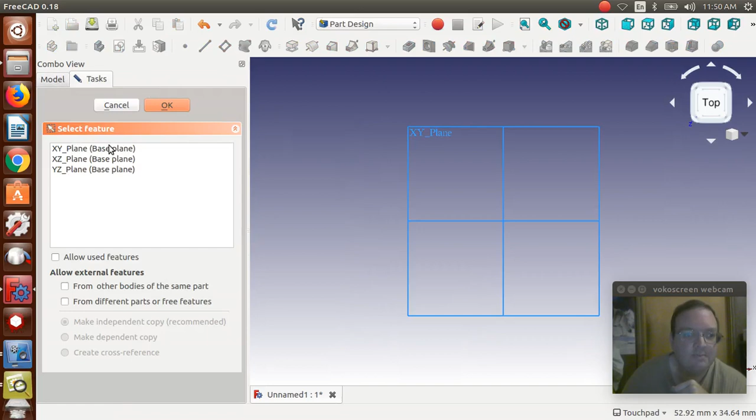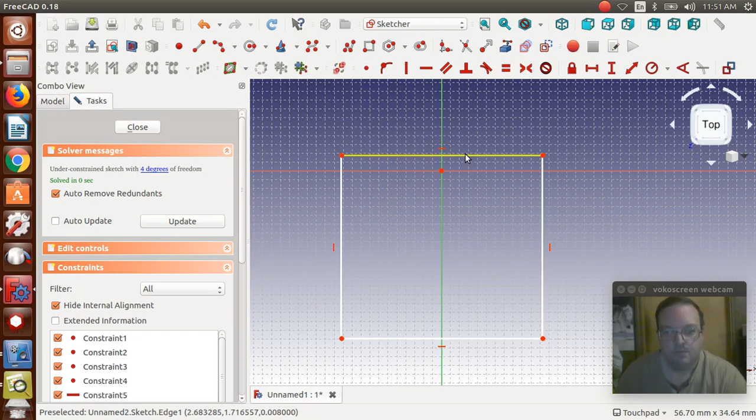Bring this up and over a little bit so you can see. I'm just going to create a box. I'm going to make this 66, and I'm going to make this one here 40. And then I'm going to make it out of symmetry, so that's in the middle there. Then I'm going to go 5 millimeters, so that the brow is 5 millimeters above the.

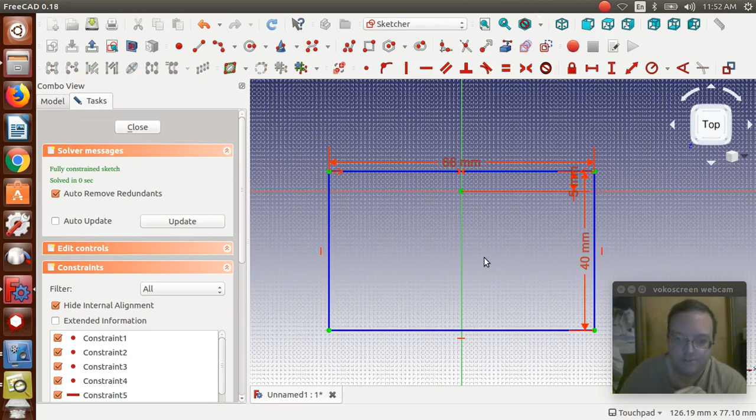And then I'm going to select all the lines by control clicking, and we're just going to make that a construction geometry. Then I'm going to use, if you go to this one, I like to use the 3-point arc. Click the ends of this and bring the brow down some.

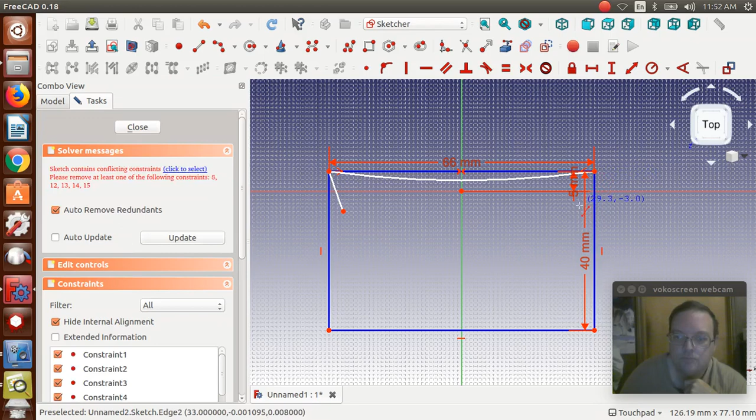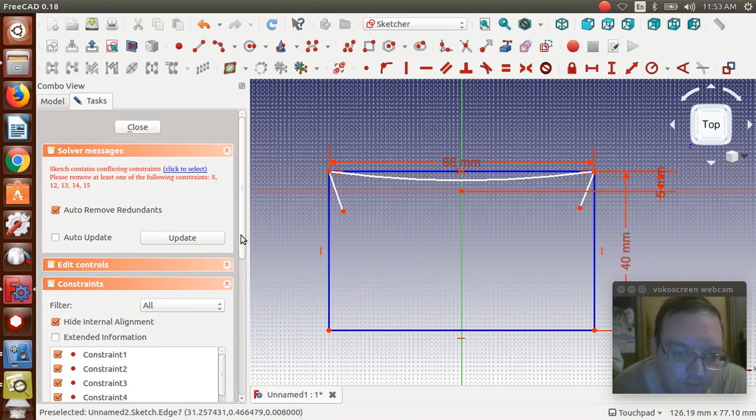Click there. Then I'm going to click, wait a minute, I'm going to make 2 lines. Something happened there. What happened? Seeing I was in conflicting constraints, normally if that happens, I'm going to go to the last constraint, see what it says, and just delete that one, I guess. Okay.

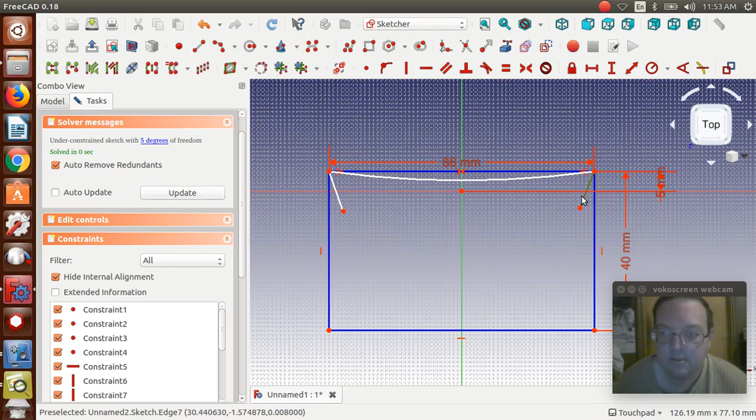Under constraint now, I didn't get this attached when I did that, so I'm going to attach those. Okay, I want to select both lines, I want to make them equal. I want to click the ends and the middle and give that a symmetry constraint so that they should be about the same angles.

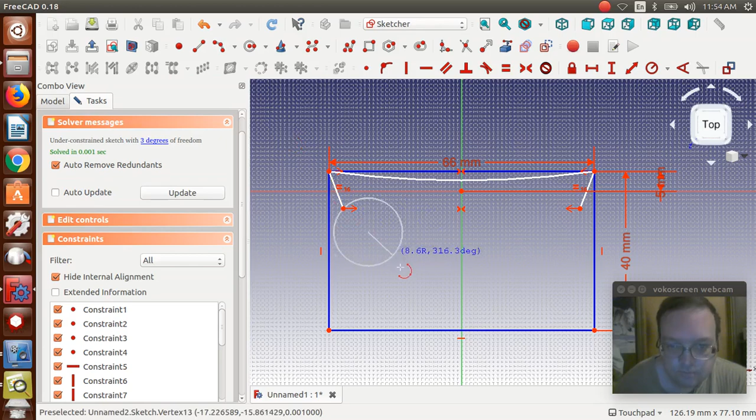Then I'll go back up to my 3-point line, arc. And I want it to be just inside. And then bring it up there.

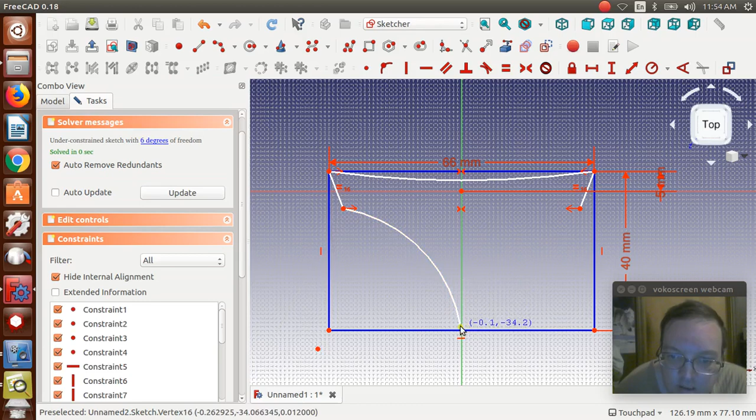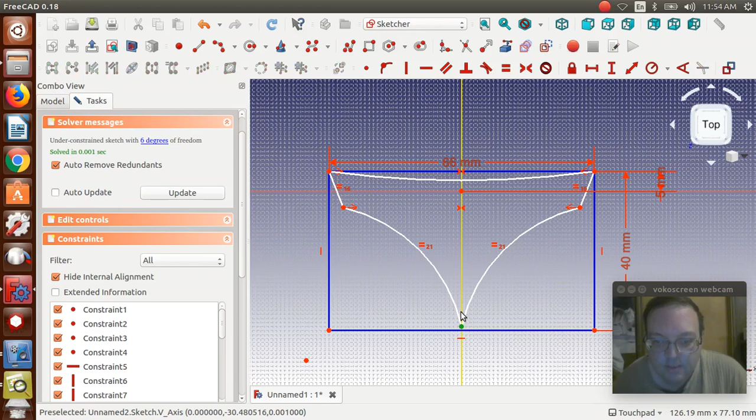About there, and I'll hit escape. I'm going to select both arcs and set them to equal, then hit escape. Hit the middle point here and this one here, and make sure they're pinned to it. That way I know it's exactly in the center. That should be it for this part.

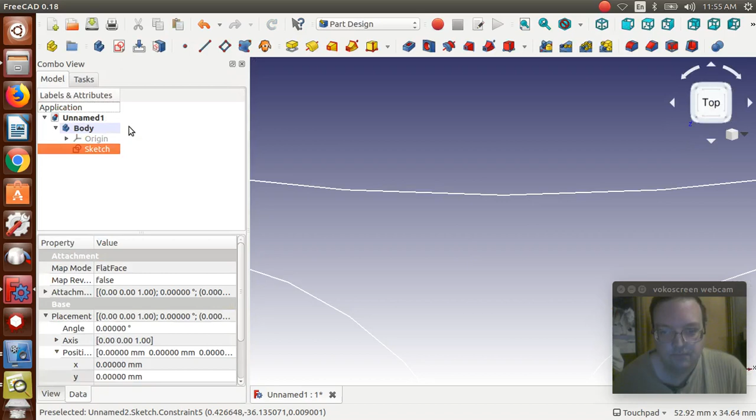Make sure it says solved and everything. Say close, and I'm going to zoom out. We're going to pad that, and it goes to 15. Say okay.

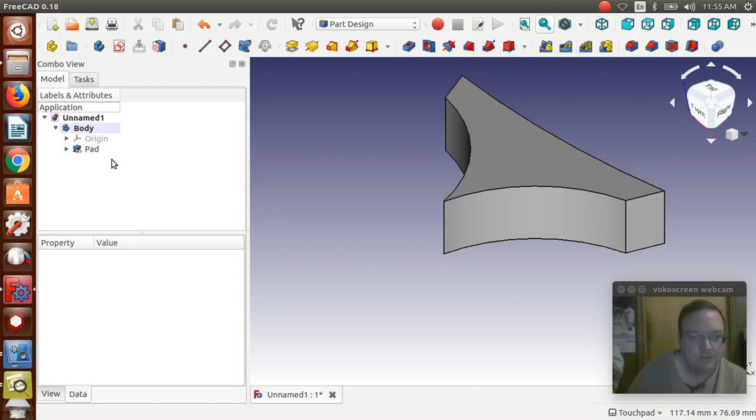Okay, so that's our brow. Now what we're going to do, I'm going to hide that for right now, and create another sketch. This one's still on the XY plane. Zoom in a bit.

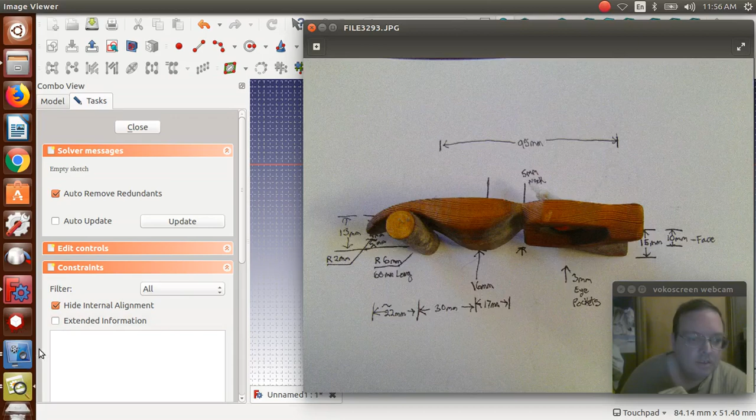Now what we're going to be doing is this shape here. It's going to be basically this shape.

So what we're going to do is start off with a line that's the 65 on the top. I'm going to make another line here that's the 40, and that one will actually be a construction line - just a guidance for where the arcs will be and where everything else is. Then there's going to be another construction line that will be the 75 millimeter here. So basically it's the point from here to here, and then there's the little 5 millimeters as part of the neck. So alright, let's go back to FreeCAD.

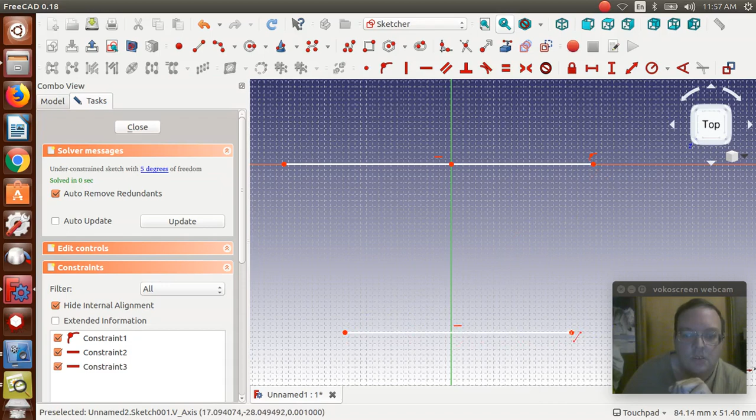We're going to create a line here, create another line here, and then I'll go ahead and make the line here. Escape. I'm going to turn that one already into a construction line, give it 75. This one here is going to be 40, and again construction line. This one up here will be 65.

And what we want to do is select those and make it symmetric, same here. This one down a little. Now from here to here, the height of that is 35, I believe. Better double check. Yep, okay.

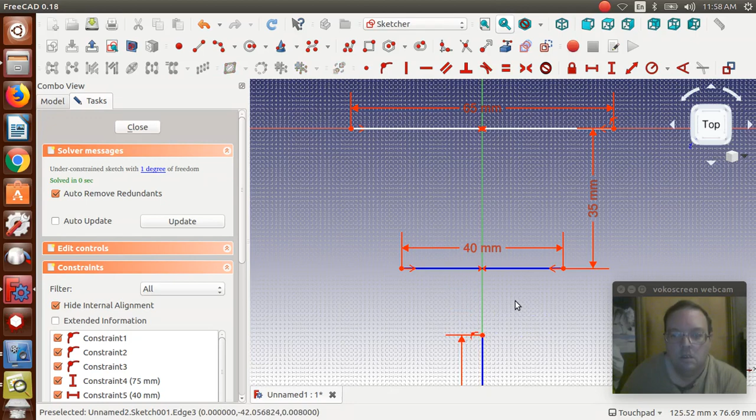Okay, so now I'm going to use the 3-point arc.

Tricky part is to get it about the same. Hit escape. What I'll do is select both and say equals to try to give them that, and maybe bring it in a little. Oops, okay, well sometimes it's a good idea that...

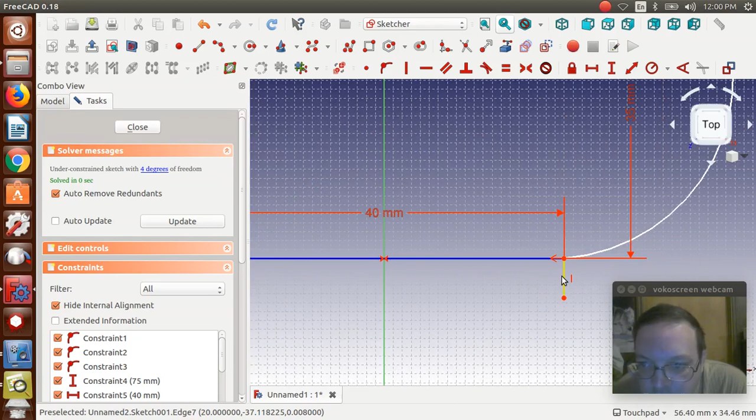Okay, and then we make 2 lines. Escape. Make sure that those are connected just in case - if I didn't connect them, then this won't work.

Okay, we're going to select that, and it's going to be 4 millimeters. Oops, did I not select it? Four. And we're going to make those 2 equal.

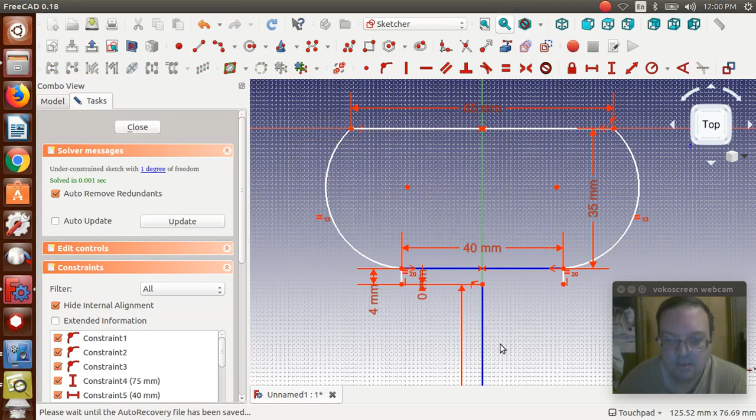And then what I'm going to do here is click this one, one of these, and say that that's a 0. That way I've moved my center line right up to that point. This is just another guideline.

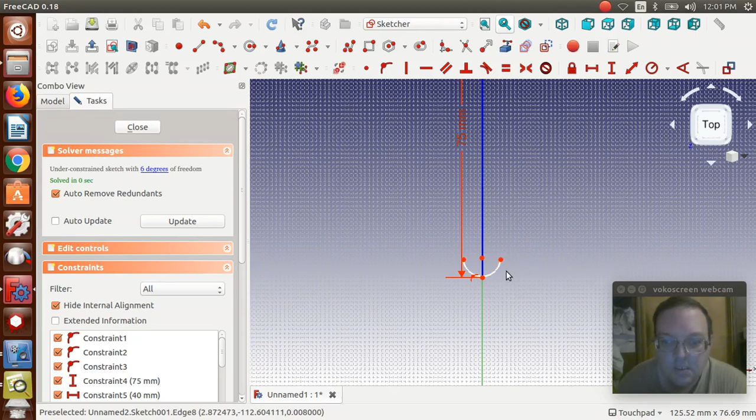I'm going to use the 3-point arc again, which is basically putting it at the end to the tail. Zoom out a little. 3-point arc again.

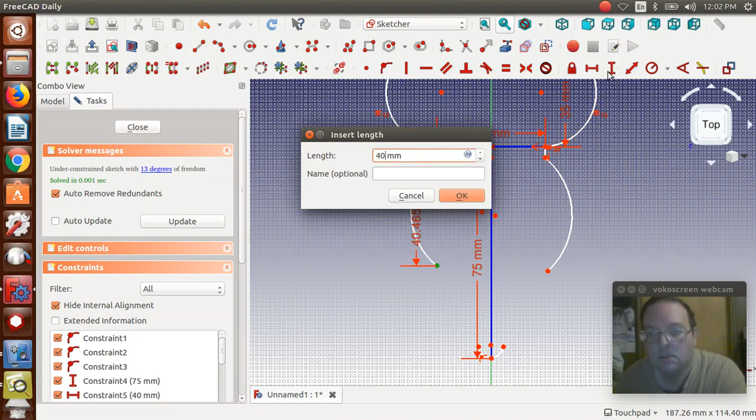Escape. I'm going to make the height, let's say 40. And click those, make them equal. And this will do it.

Just adjust it until you like it. You could put a symmetry, bring it back together a bit. I think they need to go out a little. Okay.

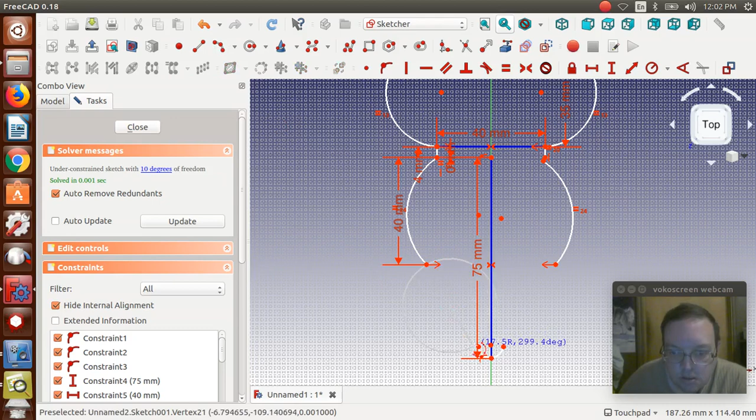3-point arc again. Escape. I'm going to pin this to the center to give it a better fit.

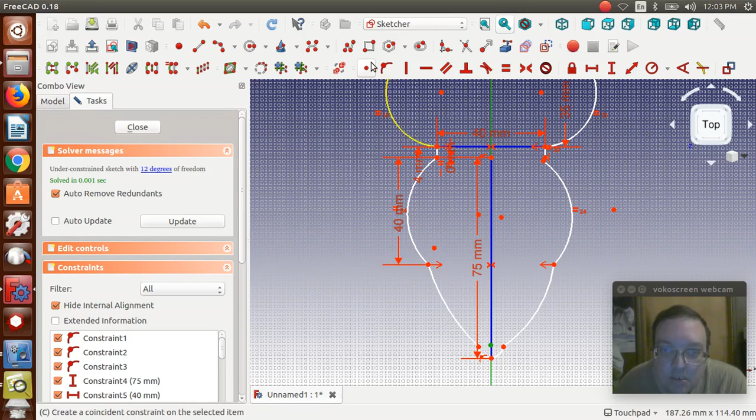Okay, and you know, play with this until you get it the way you want it to look. It's not going to be an exact science here on this one. Oops.

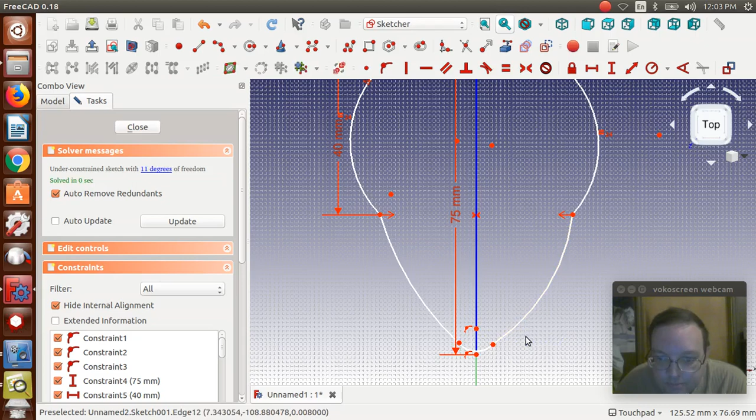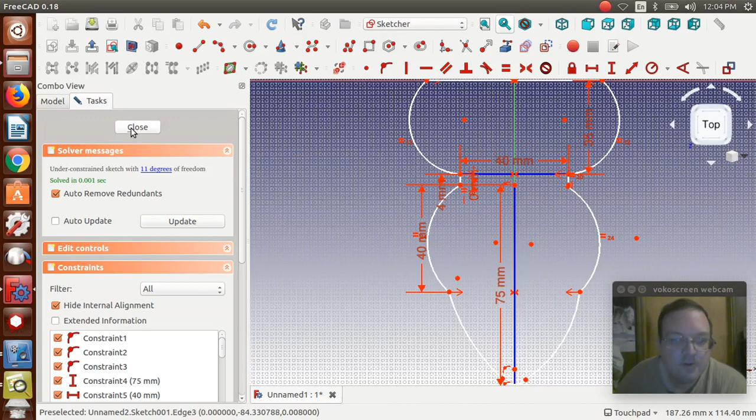I'm going to just say that's good enough for right now. Like I said, you can play with this to get whatever shape you want. If you want the tail more pointed, do that. If you want this to look more like one rounded arc, go for that. I'm kind of giving it more of a bump here just to make it look more like that's the wing.

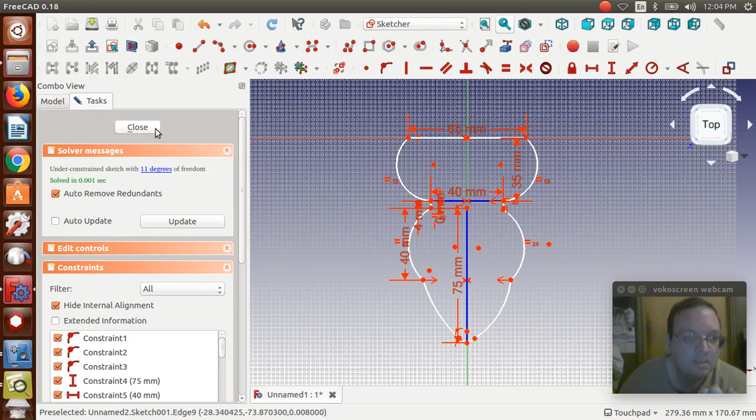I'll go ahead and close that. Zoom out. I am not going to pad this. I'm going to go to part. I'm going to select the sketch and give it an extrude.

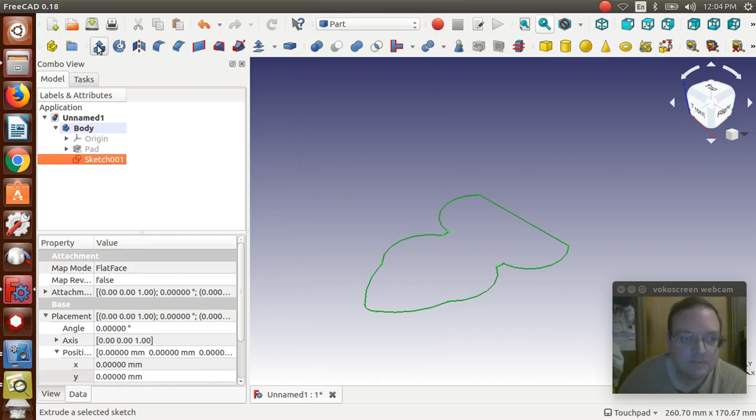I'm going to make sure that it says create solid, and I'm going to go 18. Uh-oh, something was not closed.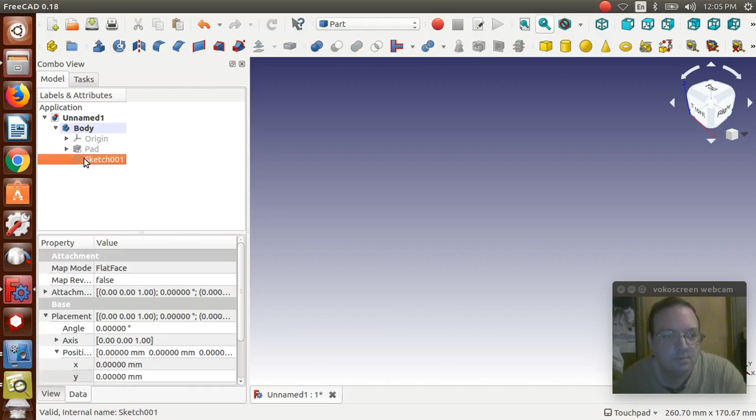Okay, I messed up somewhere. So bring the sketch back up, go back into sketch. Somewhere I messed up, okay.

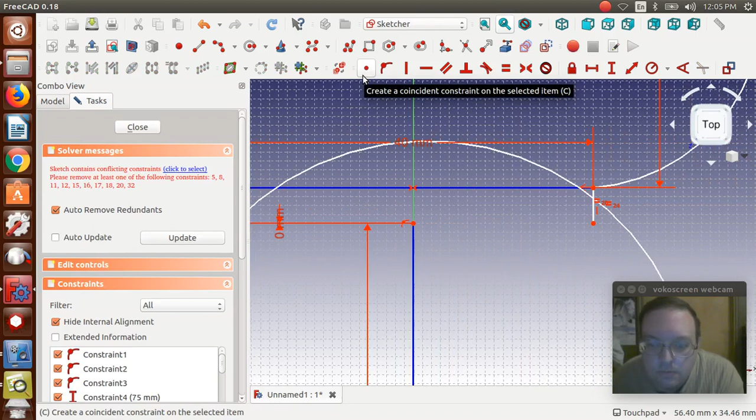So you want to make sure that all of these are connected. Yep, there it is. Uh-oh, what happened?

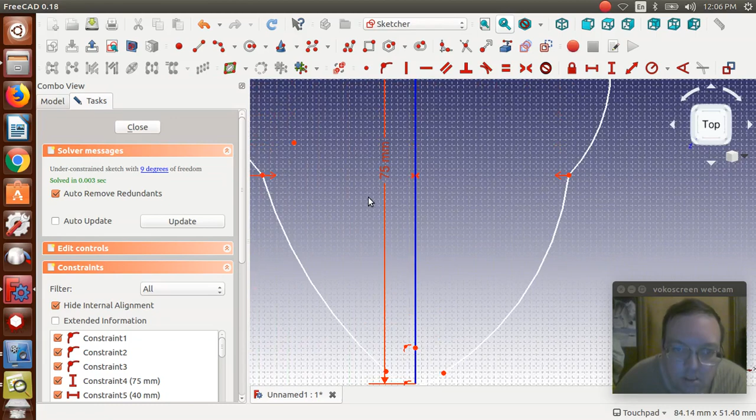Okay, just inspect the others in case. Those look okay. Hopefully that was it. Sorry. Close.

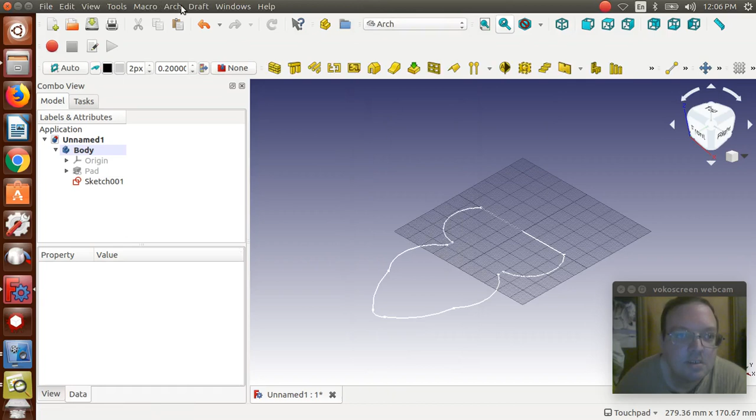Sometimes I feel like I'm just bumbling now, but okay. Back to trying to create a solid.

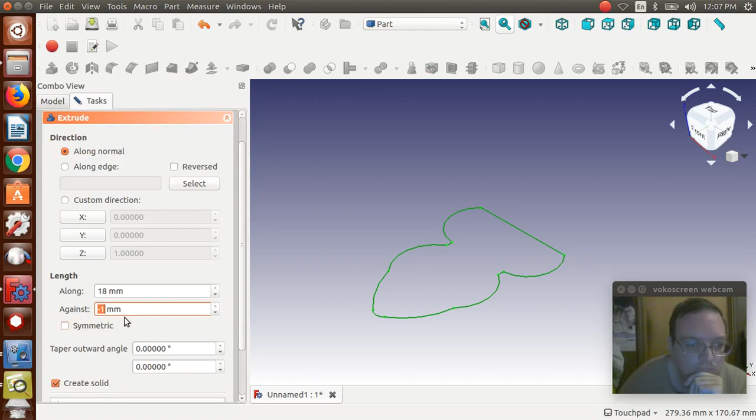Okay, there we go, and we're going to hide that. Now we're going back over to part design. We're going to create another sketch, this time on the YZ plane. Say okay.

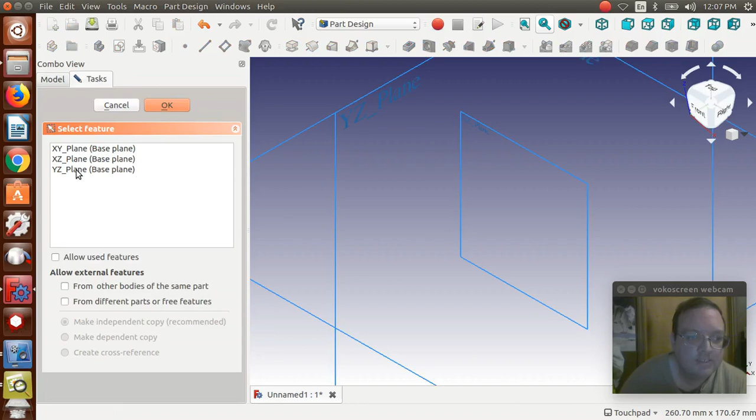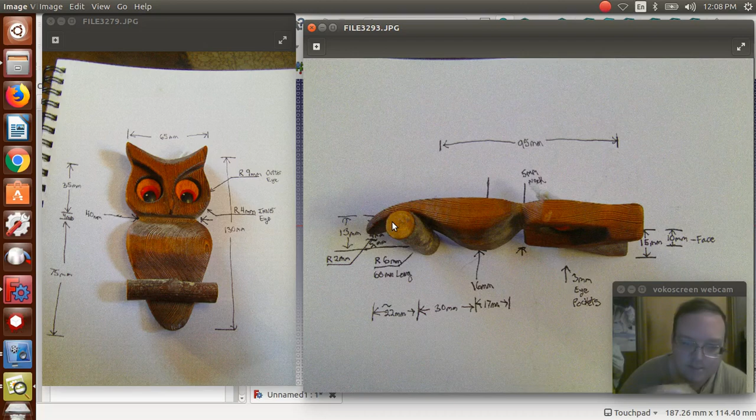This time what we're doing is this shape here. Basically it's going to be a straight line for the 95, up the 10, back over 35, we're going to go down, we're going to get a 5mm neck with a 4mm wide part, and the rest will be 16, and then the rest of the tail. We're going to create the circle here, but that's just going to be construction geometry as a guide to where to make these arcs here.

So let's go back over here. I want the polyline tool. Gonna go click here, click on the origin, come up, this way, down, and hit escape.

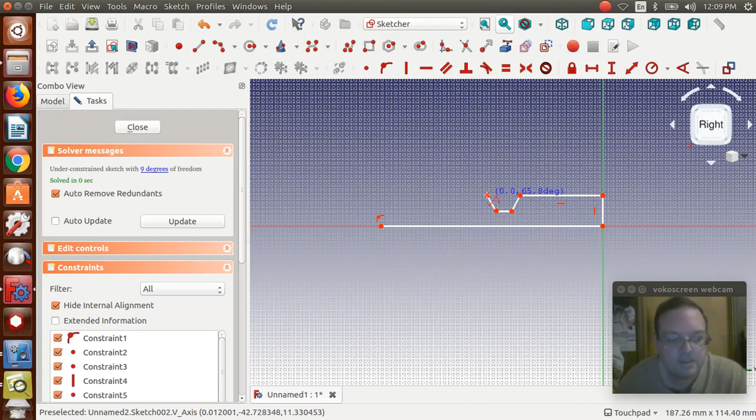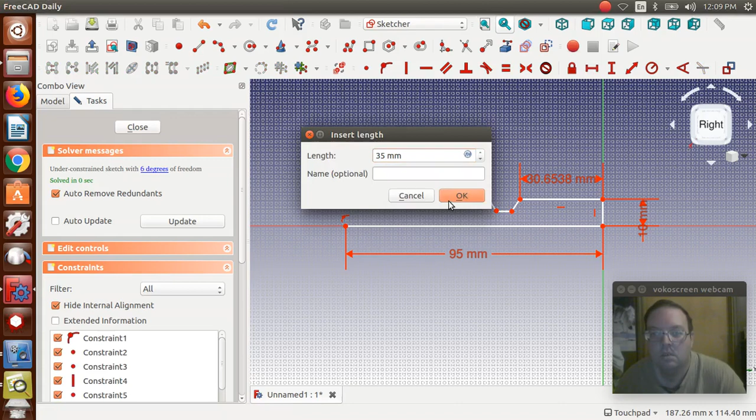We're going to set this one to 95. This one here is just 10. Set this one to 35. This here is just 4. And we want to make it angled slightly, that down here.

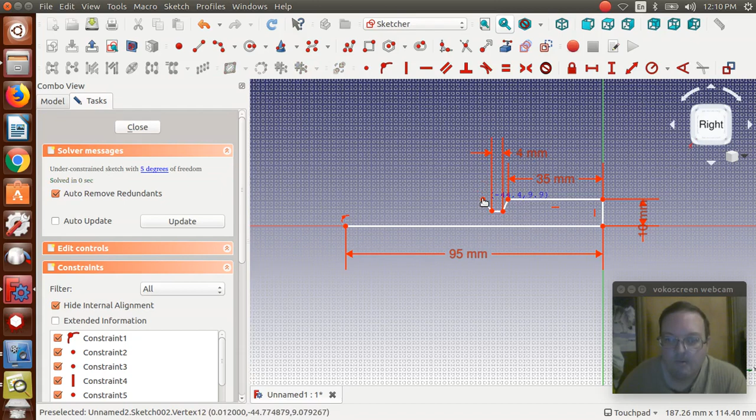Okay, and then I'm going to go ahead and create that circle. We're going to set that to a radius of 6. Then it needs to be about 13 millimeters above the...

Then we're going to go over here, and I'm going to use a 3-point arc, and first I'm going to start off with creating the tail. I hit escape. I'm going to set that to a 2mm radius.

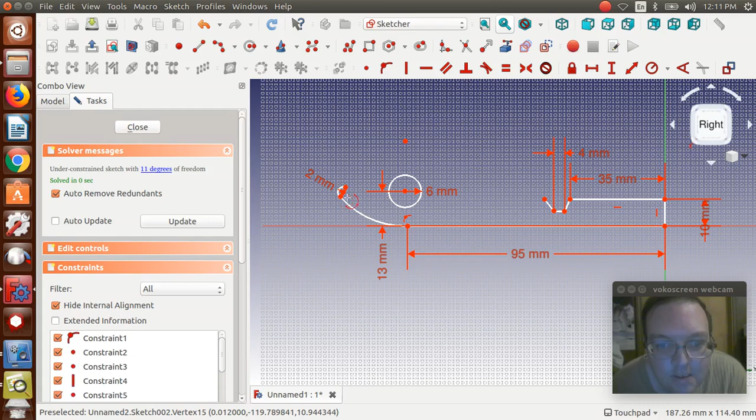And then I'll do a 3-point arc again. Oops, where'd it go? I don't know what happened. Just hit escape and try again. Where's it going? Why is it doing that? There we go. Okay, I'm going to escape on that.

Now this to this is 20 millimeters. I know the thing says 22 in there, but you have to account for the radius of the tail end, so it's 20 millimeters.

Then it's only up from here to here is a 7. Oops. I don't know why am I selecting these. There, okay.

And so we want to bring the tail arc back around. So it looks like it's about there. Now I'm going to go 3-point arcs again.

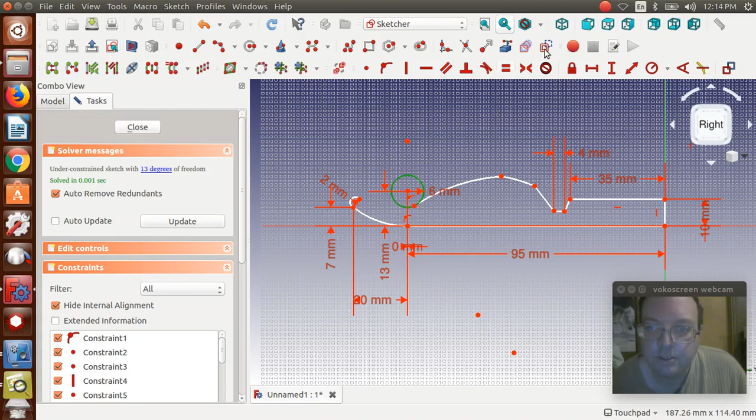Now, I'm going to switch this to being construction geometry and try again with the arc here. There we go. And then I'm going to hit escape.

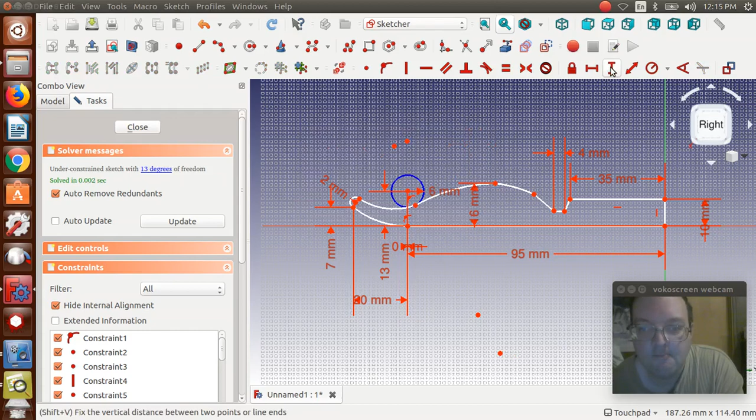Move that over a little more. Now from here to here, is this supposed to be 6? It's way higher than that. Okay, and if I have everything connected right, let me double check.

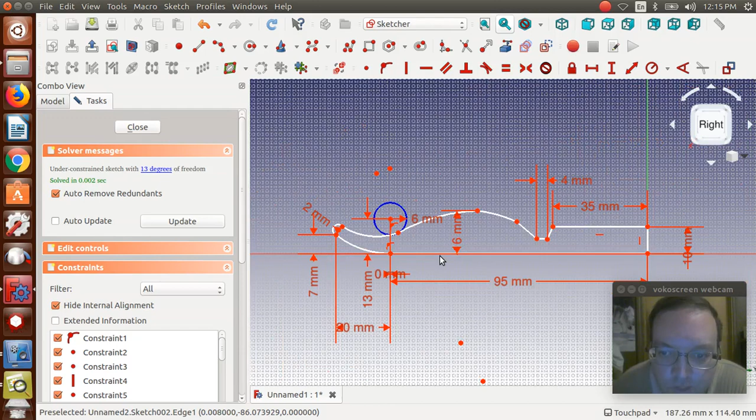That should be it. Close.

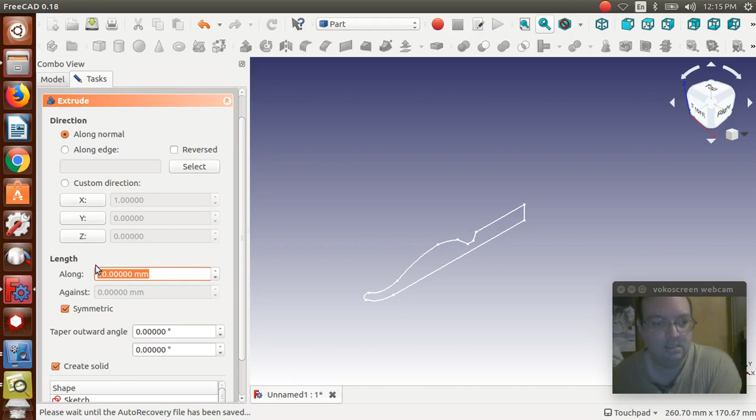Now we're going to extrude that too, so we're going to go part, we're going to do extrusion, and we're going to say symmetric, make sure create solid. This doesn't really matter, so I'm going to go like 80. It's okay.

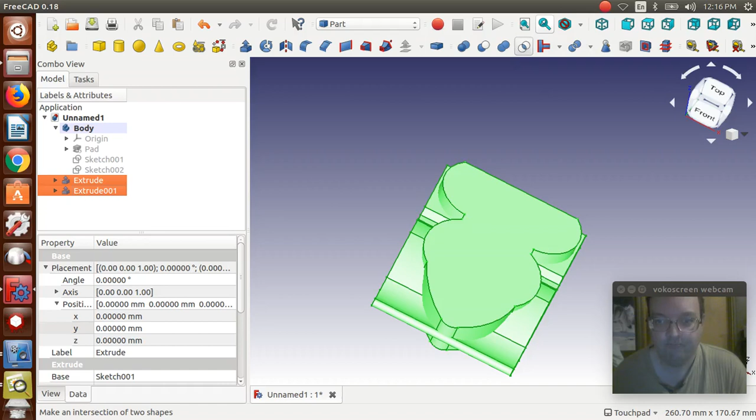Alright, so now we have these two extrudes, right? We're going to use them to create the body shape. What we're going to do is we're going to click the extrude, control click the other one, and we're going to use the intersection. And that creates the body part.

We're going to bring the pad back up just to see it. And now I'm going to go ahead and create the cylinder for the, oops, I created two. I'll delete one for a moment. This is going to be a 6mm radius.

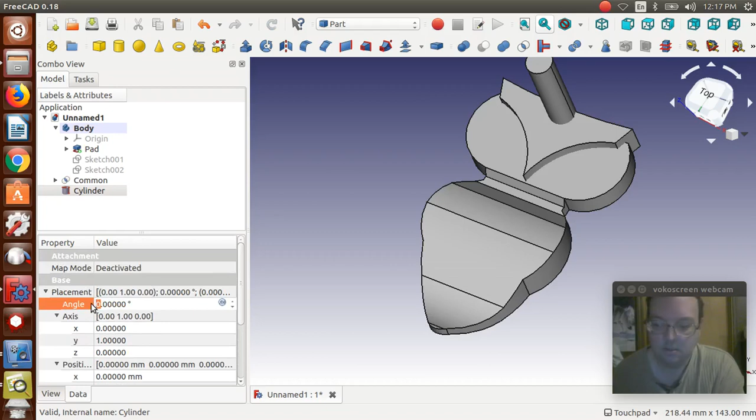We're going to say, let's say 60 long. We're going to change the axis here to Y so that we can rotate this. We're going to say 90 degrees. We're going to bring the position of it on the x-axis -30.

And then Y, well, Z should be that 13, that way, and negative, and Y, well, you can probably just scroll down until it reaches about where it's supposed to be.

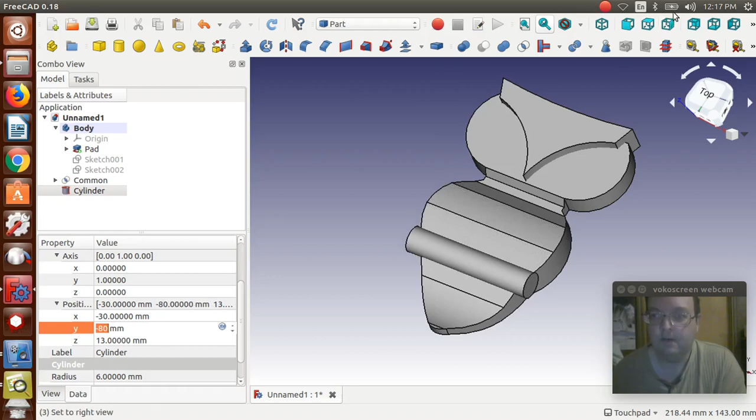It might help if we were viewing it from the side. Okay, so you want to make sure it's kind of overlapping a little.

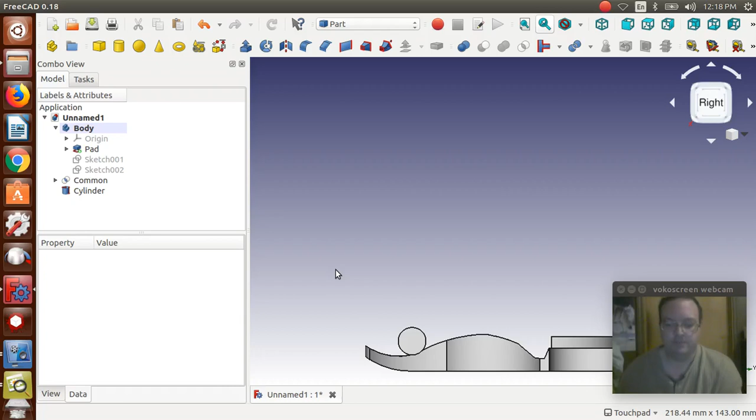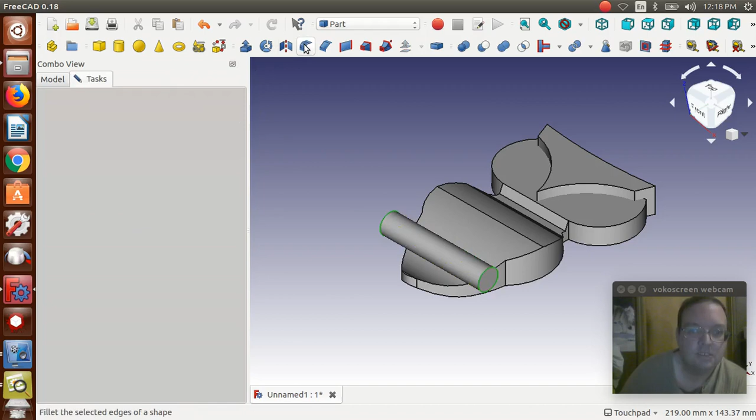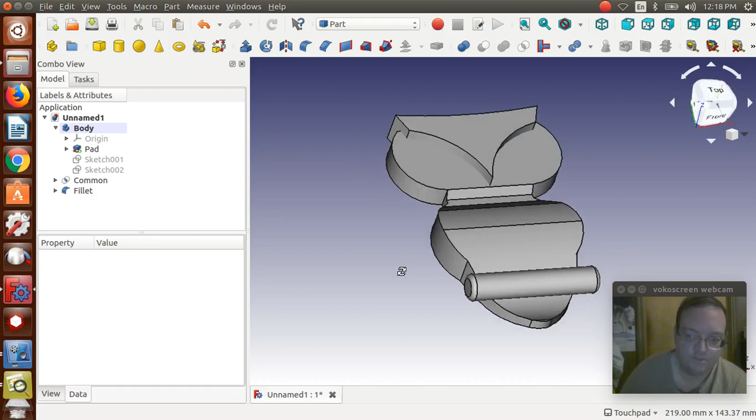Now, depending on what you want to do, if you're trying to 3D print this, what I would do maybe is make this cylinder part of a different part of it, and give this a couple of fillet edges. I'll put a 2 on that. Just because if I 3D print it, it's going to look prettier. But you could make it part of this STL, or make it a separate STL and print it out as a different part and then glue it to it, depending on what you want to do. For the contrast, it'll give it a different look.

Now I'm going to create another cylinder, and bring it up. The height of the face is 10 millimeters, so I'm thinking I want it to be at 7, giving it a 3 millimeter hole.

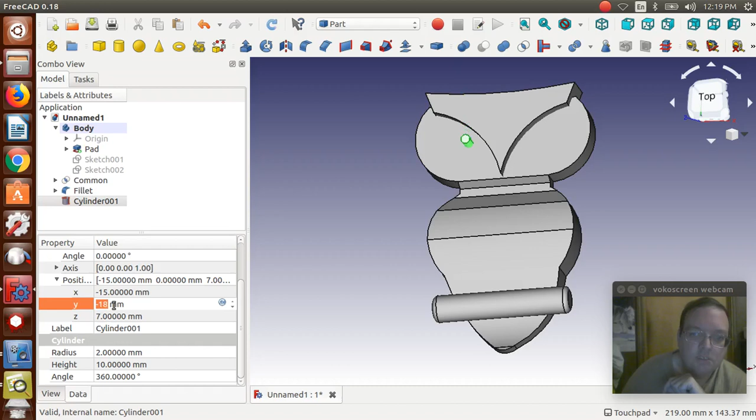I'm going to move it both on the X and Y negatives, and then increase the radius. Go a little bit more.

All depends on what you want to make the eyes look like. And I'm going to copy that, and make the radius smaller. Move the placement a little.

And then on this one, I'm going to bring it up. Well, no, I'm not going to do that. I'm going to shrink it so that it's only 2 millimeters.

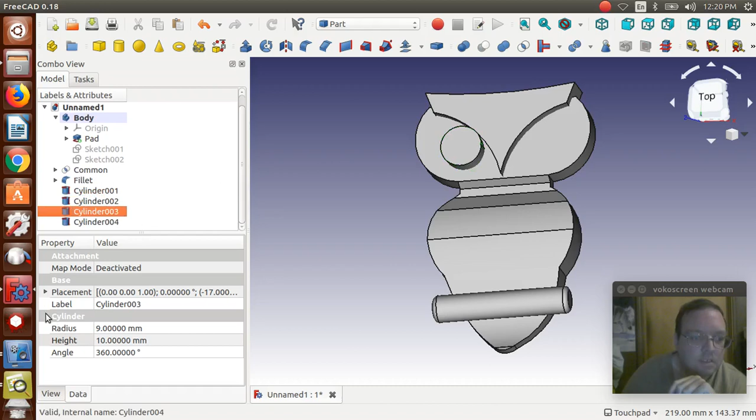And we're going to copy those. Control copy, control paste. And I'm going to go in here, change the placement. And instead of it being negative, it's going to be positive on the X. Same with the other one.

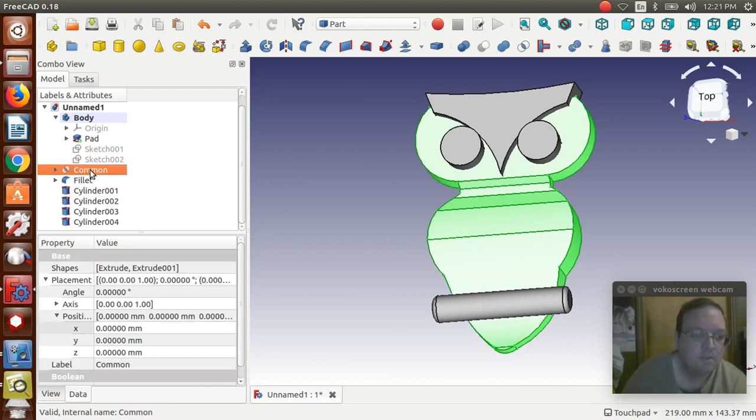You can't see the other one right now because of what's going on. But what we're going to do is take this. We're going to control click cylinder 1, and cut it. Take that cut. Control cylinder 3, cut that one. And now we've made our eyes for the owl.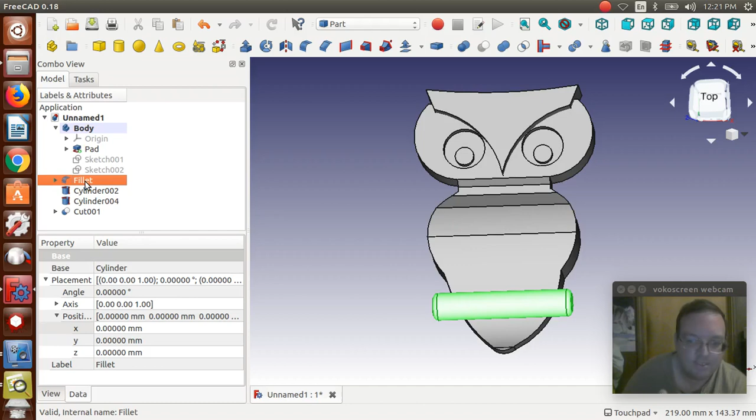And like I said, it depends on what you want to do as far as the branch. If you want to print it separately on a 3D printer, I would do that as a separate STL file. But right now what I'm going to do is just make them all part of the same thing. So I'm going to control click the pad, control click the fillet, cylinders, the cuts, and then union. Now they're all one part.

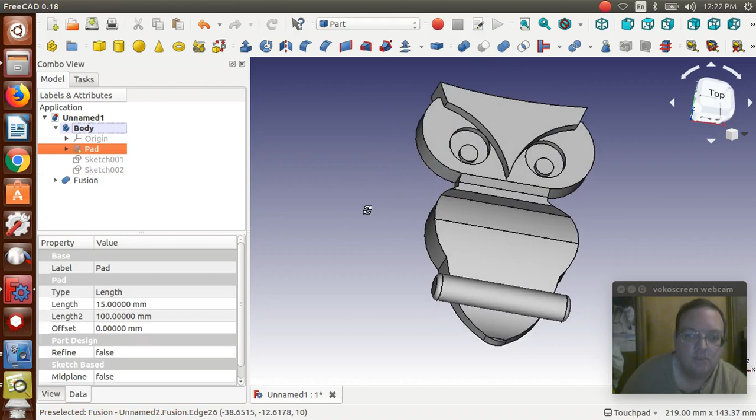And we'll take that and go File, Save. Owl decoration. Let's say Save, and click the Fusion, go File, Export. I'm going to do it just in the STL format.

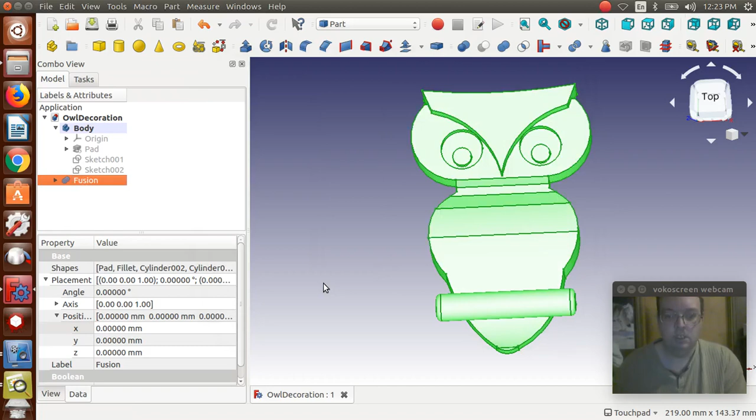If you're using a newer 3D printer, you may use the AMF format instead. Well, it depends on what you want. So that's our owl decoration.

You might want to poke a hole in it somewhere, maybe up in the brow, for like a nail. That wouldn't be hard. You could just make another cylinder. Give it a bit bigger radius, I'm going to go 3. Height 18, so you can see it. Then position it Y down a bit. Oh, that looks pretty good.

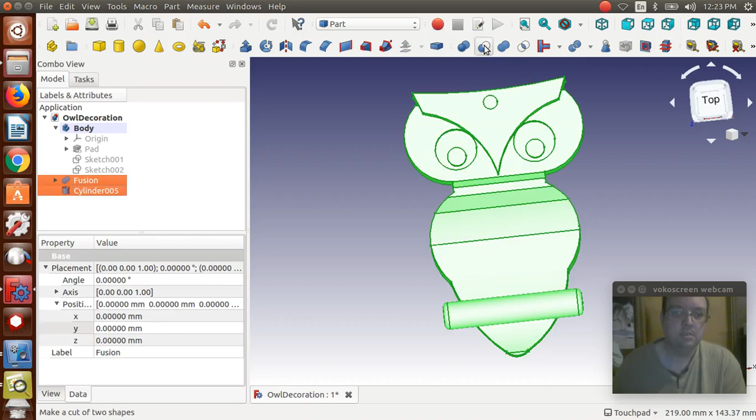And then you can take the fusion, control click the cylinder, go cut, go hole, go file, save, and do the same thing again with the file. Well, I have to click it, but click the cut, file, export. I'll go ahead and do the name at this time. Save. And then there you go.

That's the owl decoration. I hope you enjoyed this video. I hope it helped.